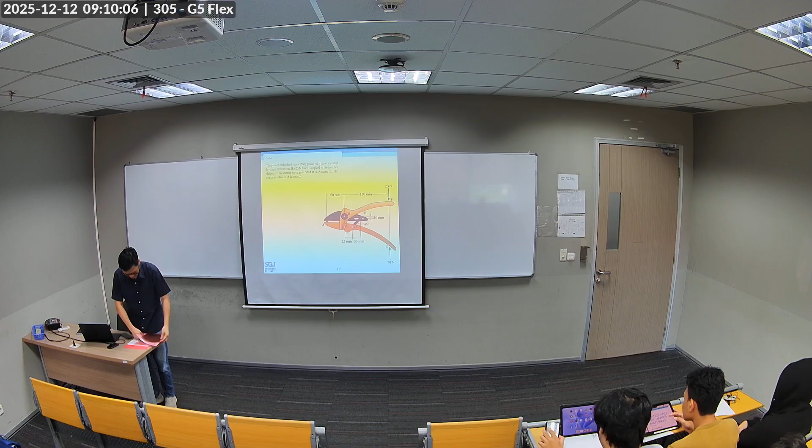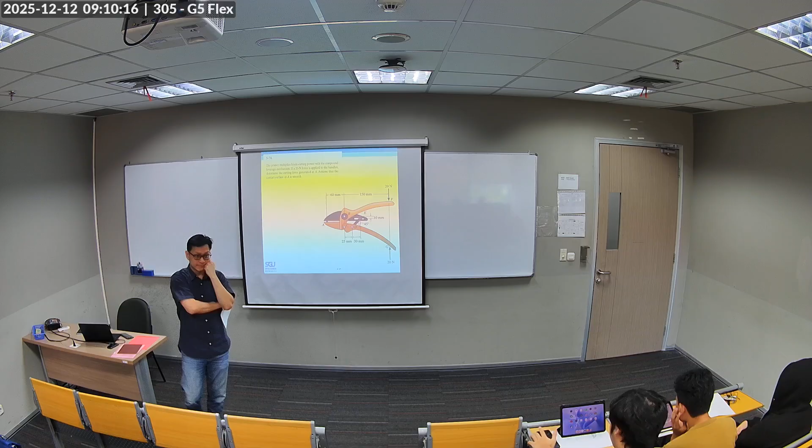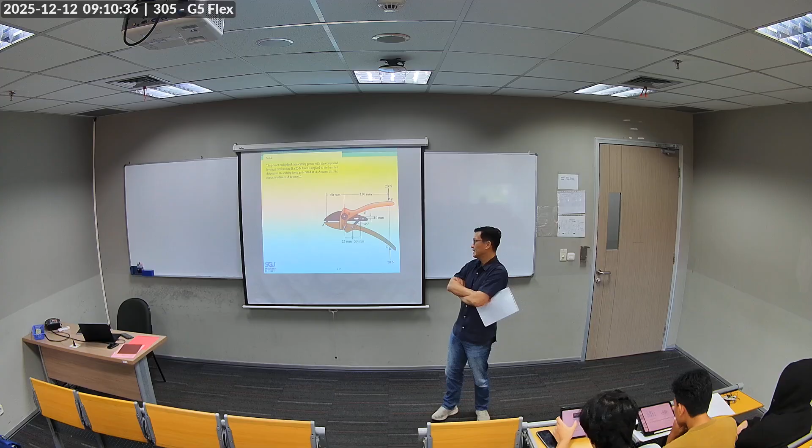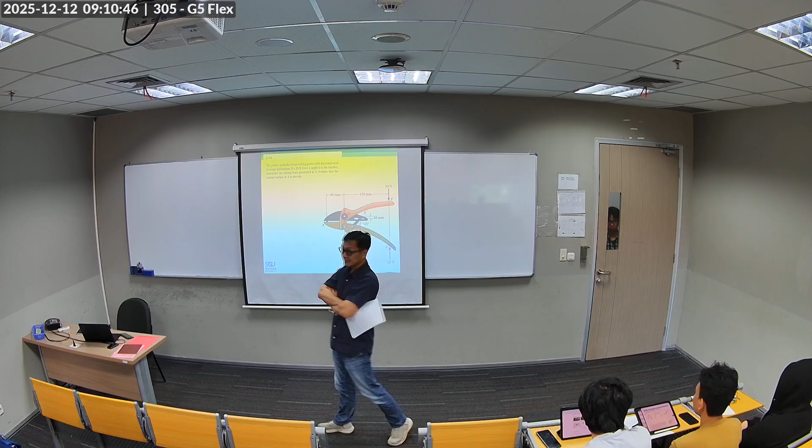Okay, so we need to do a few exercises today on frames and machines. I think we did a little bit last time. Let's do more problems because the final exam will basically be frames and machines. Okay? So these kind of problems. So the final exam will be 2 problems and I think both of them will be like this. Both problems. I don't know, maybe I'll do one truss like what you just did. You want to do trusses? I don't mind. 2 problems on this, 1 problem on truss. How about that? 3 problems? You got 2 hours. How long do we have? 2 hours. That's a long 2 hours. What are the options?

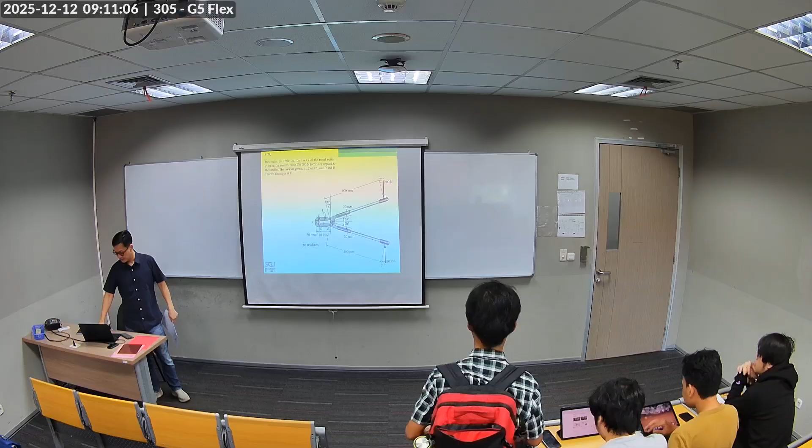120 minutes. Option A, 2 problems on these types, frames and machines, right? Or 2 problems on this plus 1 problem on trusses, what you just got back. I mean, if you do 3 problems, then this might actually help you, I think, if you feel more confident. Who is more confident with trusses? Nobody? Okay. Because that might actually help by distributing the points to 3 problems. I guess. Okay. All right. Let's do a couple of exercises on these. Did we do this one? I think we did. No. Okay. All right. Let's do it then.

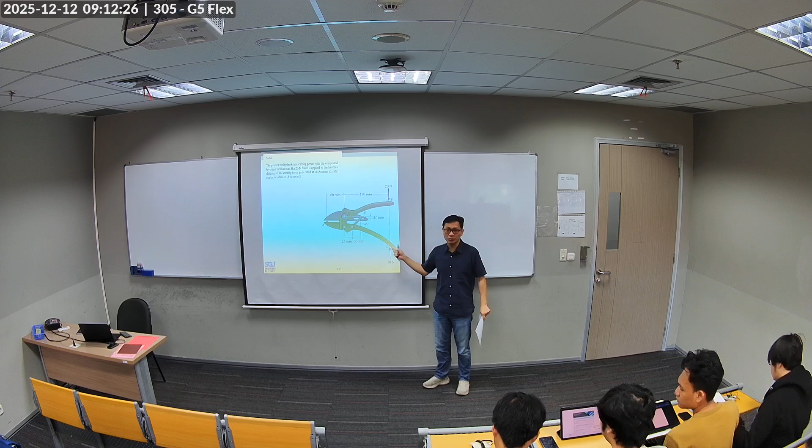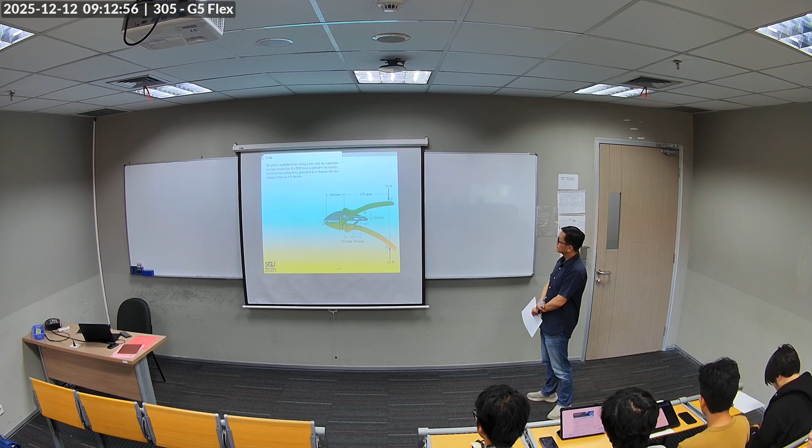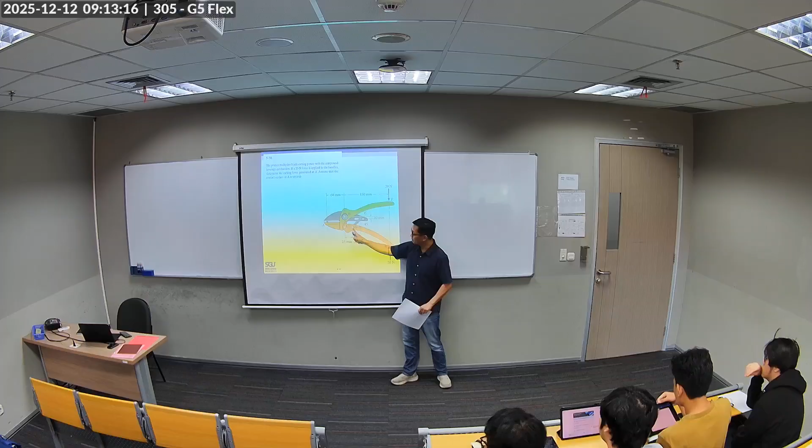By now, I expect more initiative from you guys. So tell me how to proceed. Okay, so the pruner multiplies the force from the forces here to this one. I think we did something similar, like 2 weeks ago, right? Open your notes. What problem was it? It's also a plier, right? It's a plier mechanism like this, but it's a bit different. So basically, given these forces, what's the cutting force there? Okay? So, what do you want to do? This is one body here. This is one body. This is one body. You got the link at C, linking this handle with this handle. And you got the pin at B, linking this handle with this link. And then you got the gray opposite side, the other side of the cutter.

So what will be the first step? Draw this. Free body diagrams. On which one do you want to do it? Remember, this is my ultimate outcome. Between F and B. So ABF, you want to do ABF? Yeah. Okay. So that's ABF. Let's draw all of this, just for the sake of exercise. Here, you come up and put the forces there.

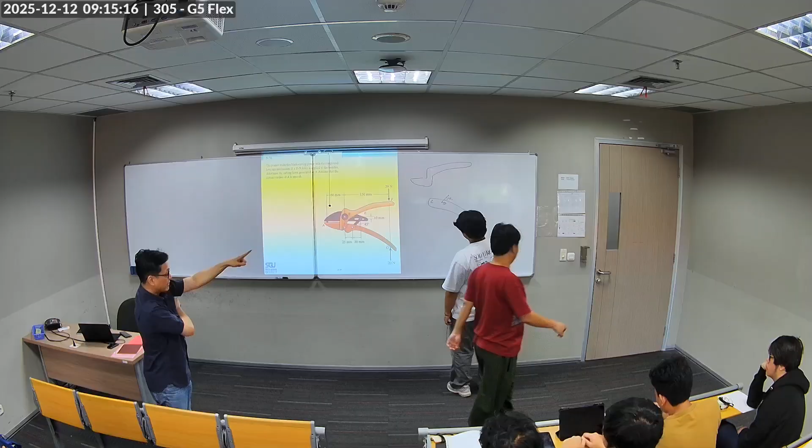Now, what is special about link DE? It's a two-force member. So what's the consequence on the free body diagram? Put the point D there. So because of that fact, what's the consequence on point D? You see what he's drawn? Only one unknown, just a single force in that direction. So you know the direction. Don't draw Bx, By. In contrast, what about C? The unknowns will be 2, Cx and Cy, because you're not linking to a two-force member. Here, the link DE is a two-force member. So if I draw link DE, what is the free body diagram like on link DE?

Okay, notice at D. Why do you draw it in this direction? Because it's opposite like that. But what about this? Its relation to this. Before you draw that, I mean, a two-force member can be tension or compression, right? Why do you not draw it like this? And this. That is also valid, right? He's assuming tension, but there is another reason, a more important reason why.

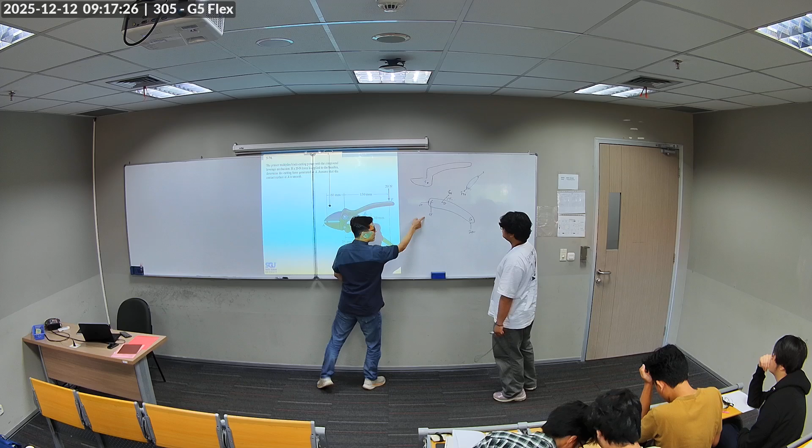Look at that. Look at this arrow. So, yes, equal and opposite. So if you draw FD like this, then here it has to be equal and opposite. Go ahead, redraw what you've drawn. Yes. Okay, is that clear? Okay. What about the link at C? Now, there is also then the point C here, right? This is point C, on this handle. So, if he draws CX and CY like this, then over there, it has to be the opposite direction.

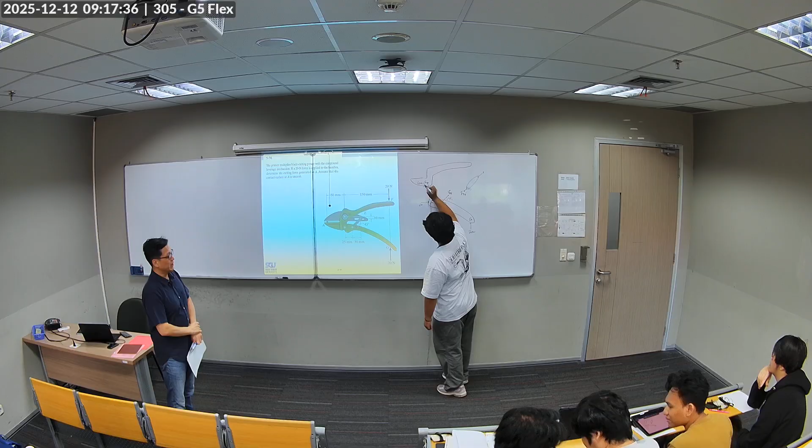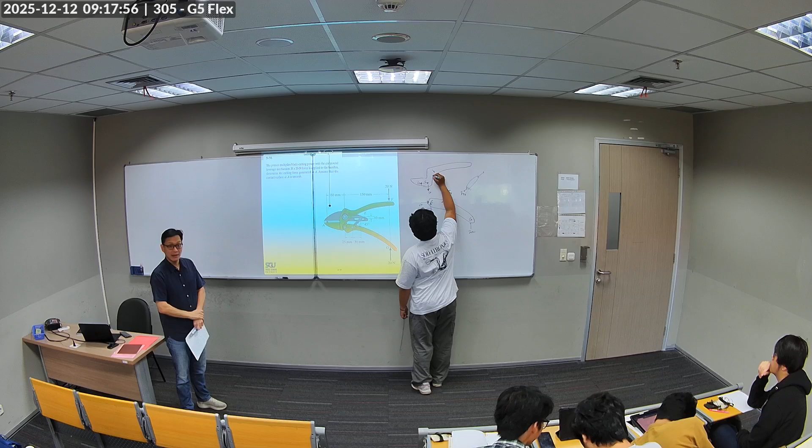Okay, make your arrow a bit bigger. Like, yeah. Okay, finish the free body diagram on the upper handle. You got the point B. Now, because we don't have point B yet anywhere along the other bodies, it's really up to you how to define it. Okay? Okay, so he defined Bx and By like that. Now, draw the free body diagram of the gray cutter. Yeah, on the right hand side.

Okay, you can have a seat. Let me have somebody else. Okay, Stephen, you want to give it a shot?

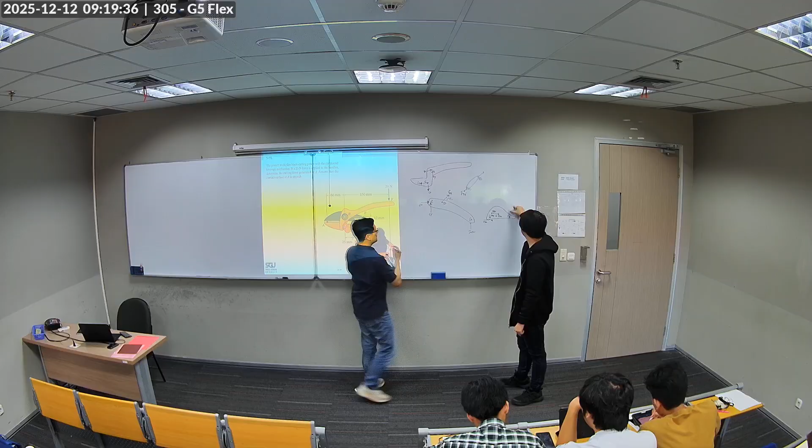So on the cutter, we have A, B, E, right? Okay. At point B, you have to refer to the other body, right? It has to be equal and opposite, because that's the linking between that handle and this. Label your forces. X and Y. Okay, what about E? Which direction should it be? This way. Okay, what is the next body after this? That link, right? And so, this is point E. Yes. Okay, does everyone see that?

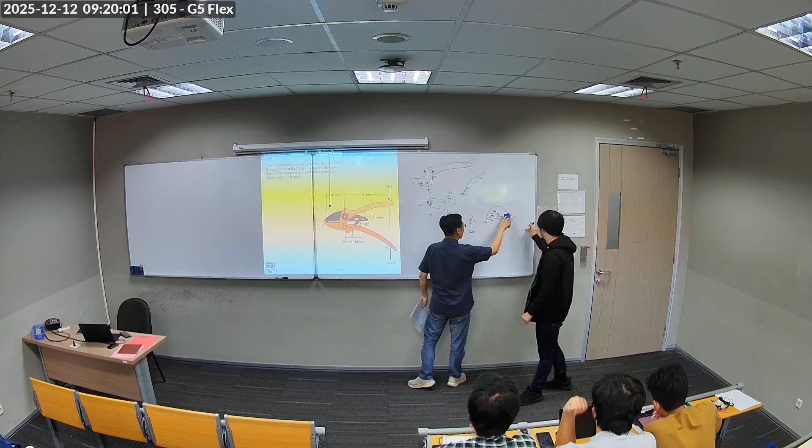Oh, you want to split that? Okay. Well, usually I don't split it until you get to the equation, so it's not confusing. Okay, thank you. So, everybody understand how the connection points have to be opposite? Okay, if you draw this wrong, then everything else will be wrong. Okay, does anyone have any feedback about the point A? Any comment on what he did? What kind of contact is that? Roller. It's not a pin.

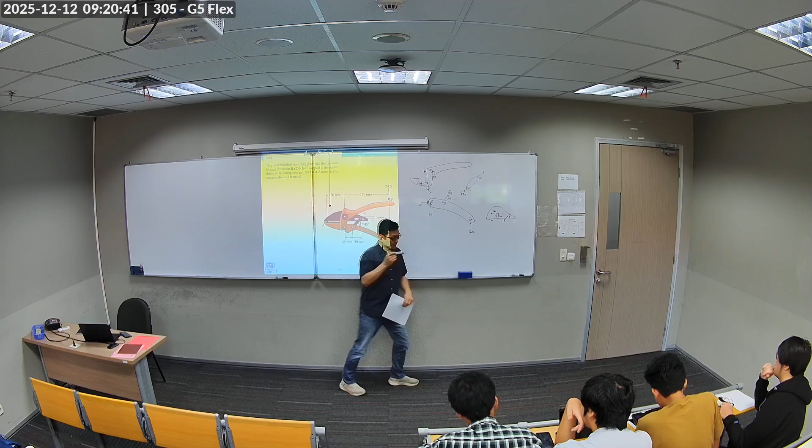Okay, so a roller will have one force, which is normal to the contact point, right? So it's like this. A point contact, it slides on this board, right? It only resists in one direction. And I would also draw it upward like this because it's cutting this wire. It's a wire, by the way. You're just looking at it through the board. It cuts the wire, so the wire actually resists the cutting. So on this upper cutter, the wire actually puts a force upward, right? The gray piece cuts downward, but the wire actually resists upward.

So if you are the cutter, you would experience a force downward or upward? Upward, right? So I'm stepping on the floor. The floor is pushed down by my foot, but my foot experiences a force up from the ground. Get it? Okay? So it's cutting the wire downward, but the wire resists upward. So you can imagine that. So the force is like this. And it's only one because it's a point contact.

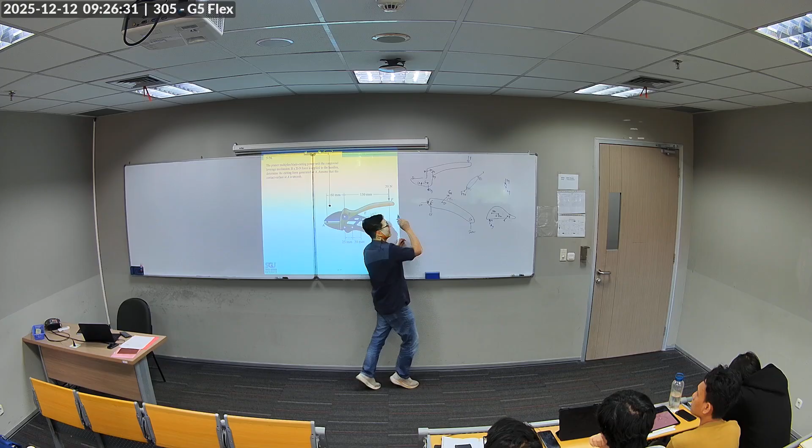I guess you can. So you're drawing two bodies in one free body diagram, you can. But generally not a good idea. If you do this, let me draw it bigger. There is a force actually from this guy, right? Because it's here. So you are eliminating that force. The one in red is there, but it's internal. Because you draw your boundary including the wire, this red force does not exist because it's internal to it. Does that make sense?

So yes, you can do this. But for the sake of learning, I want to make it simpler and just separate the wire, because mechanically it's also two separate bodies. If you take mechanical engineering as your major and more advanced courses, you can actually do a method of sections here. So if you do that, there is an internal force like that. But this force is internal, so if I draw the entire body, you see I have this force and this force and this force.

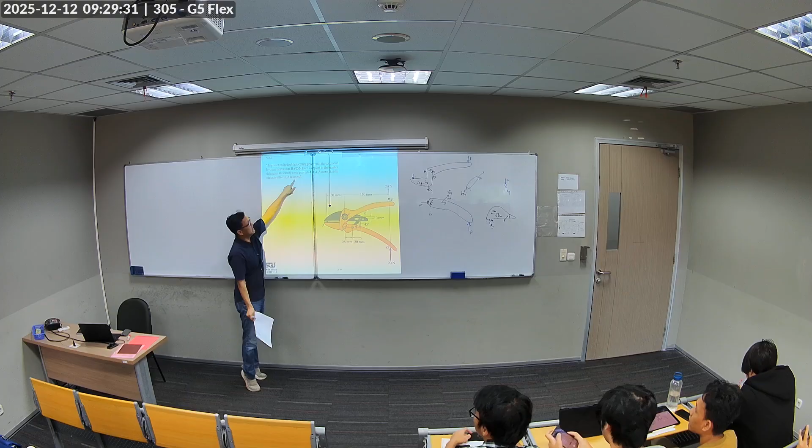Okay, time to do the equations. Assume the contact surface at A is smooth, meaning it's a point contact, it can slide, meaning there is no AX. That's what it means. Okay, let's do the equilibrium. What's the strategy? I want to know AY. I know F. How do I find AY?

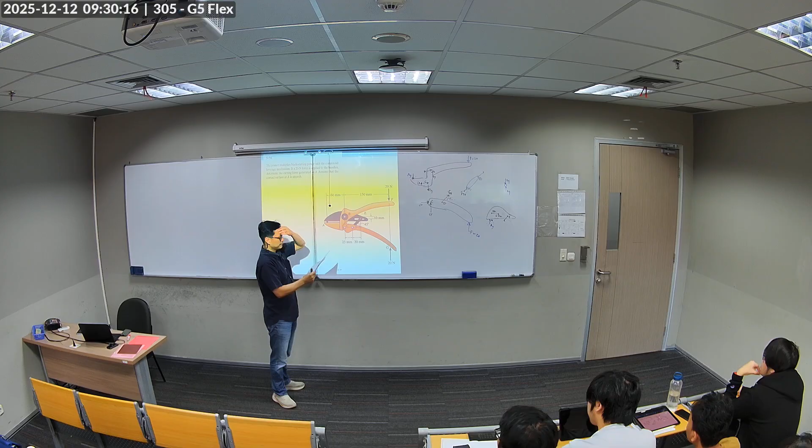AY exists here and here, so you need to trace your way from the known to the unknown. Do you want to start here or here? This is your known. If I start here, my link is FDE. If I solve FDE, it connects me here and here. So let me do that and we'll review. I start from the known, so my target is to solve this guy. I'm not interested in solving Cx and Cy because they're not relevant. So how do I solve FDE?

CD, G. This is point G. So I want to solve for FDE. I know this is 20. What do I do? Sum of moments at C, because you'll get rid of CX and CY. This is my pivot point. Counterclockwise, 20 times 150. This is the distance to point C, 150. This is FDE.

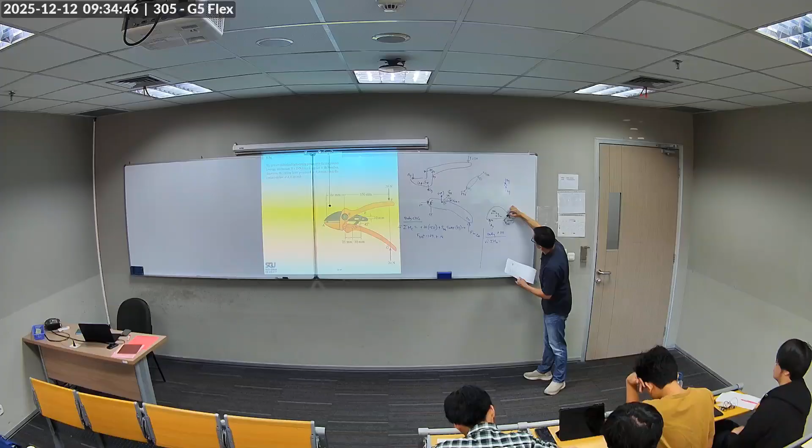Now this is a bit tricky because you have FDEY here and FDEX, both of which create a moment about B. Okay, so this is going to be a bit long.

So sum of moment about B. First of all, we have AY, so that's clockwise. So AY times 60. The distance is 60. Now I have FDEX. So I have this one creating clockwise moment. FDEX times, what's the distance? 10. Okay? Does everyone see that? This distance is 10 on this gray piece.

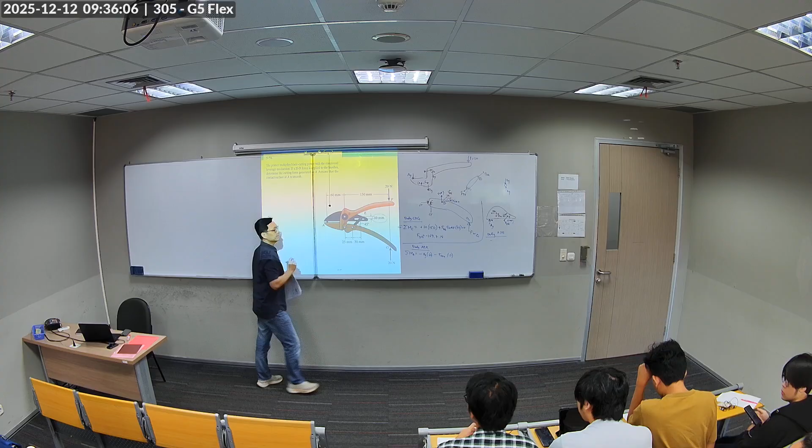And then I have FDEY. That will be another clockwise. This guy. Okay. What's the moment arm of FDEY? ...get that from? C and B are in the same spot, and the distance between C and D is 15.5. So this is FDEY. Okay, this is my pivot point. This is my distance. Okay?

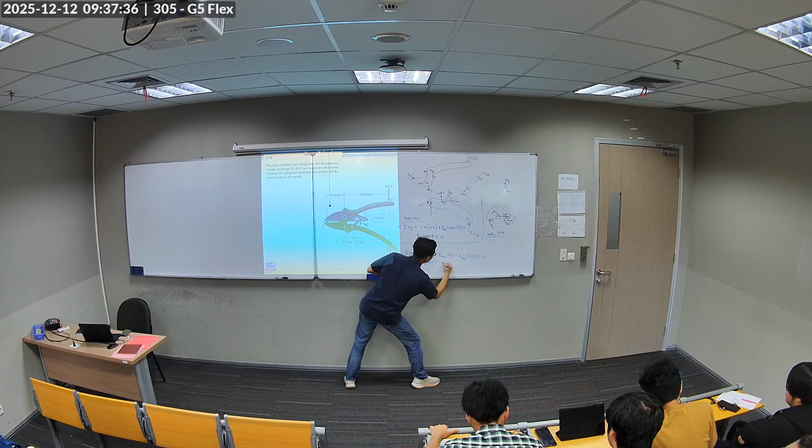Are you still with me? Yeah? Okay. Now FDEX is FDE times sine or cosine, doesn't matter. And I'm going to substitute the numbers directly, okay? So it'll be minus 169.7 cosine 45 times 10 minus, I know it's kind of annoying with this minus, but I think it's still the best way, because then you just do it with no thinking. Just carry all the signs, and you'll solve AY.

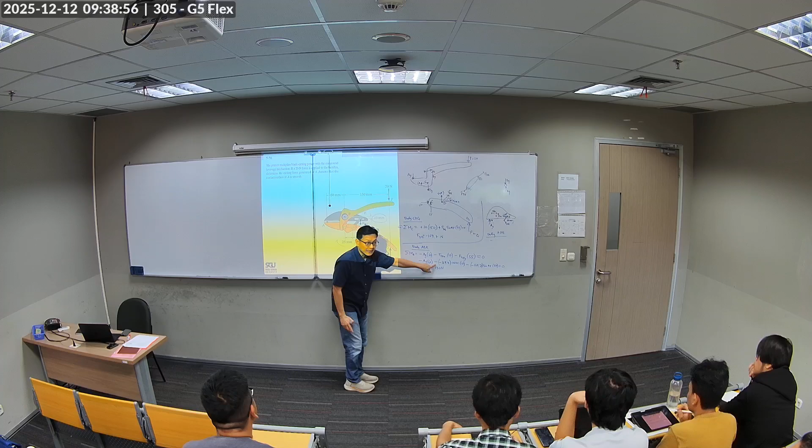Okay? What I want to highlight is we solve for negative here. Don't change the arrows. It's already negative here. The drawing should be consistent, right? It's this way here, this way, that way, and this way, right? Always equal and opposite. And then when you do the equation, you have to put in and carry the sign. You gotta carry the sign, because our assumption was already like that. Okay? The first negative is due to what? It's going the direction, right? It's clockwise. But the second negative is because we solved it to be negative with all these assumptions.

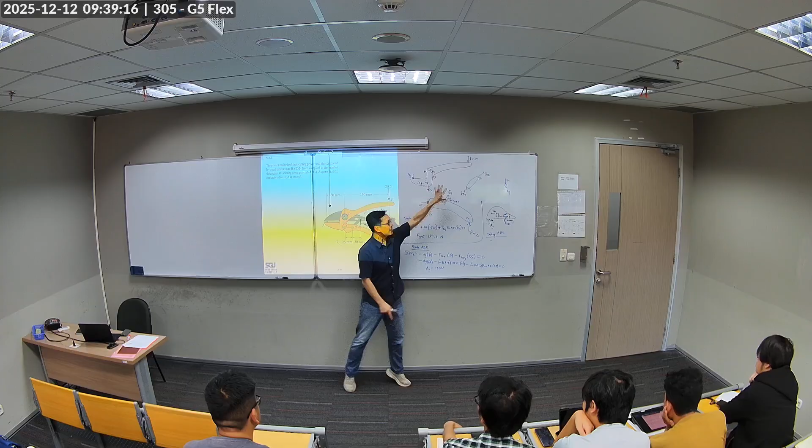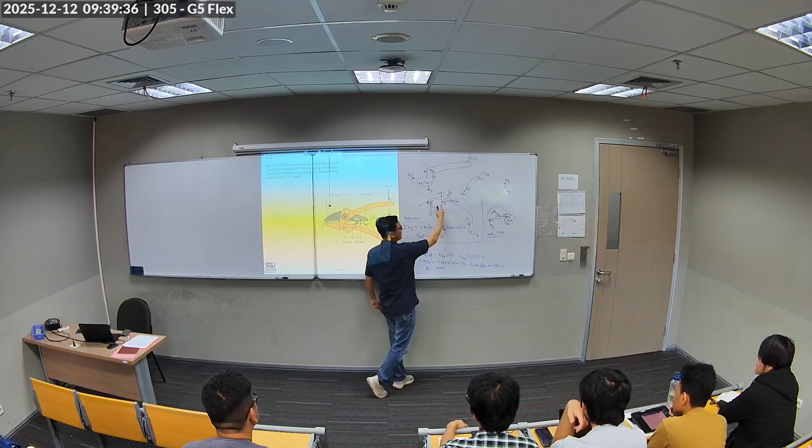See, the problem is you cannot know what it will be like unless you are a mechanically genius person that knows it's kind of pushing this way, right? I mean, sure. But most of us can't. I'm too lazy to do that. So I'm just going to draw the arrow this way, and then this way, this way, this way. Okay? Whatever it will be, whether positive meaning I made the right assumption, or negative meaning I made the wrong assumption, I don't have to correct my assumption. Just carry the sign through and you'll be consistent.

That's my method. Okay? If you want to flip the arrow, let's say you find this to be negative, and then you erase this, and you flip it, then you have to flip it here, flip it there, and flip it here. You can do that. If you really know what you're doing, I'm fine with that. But I don't suggest that. Okay? It's very hard. So we solved the problem. Two equations. Without solving Cx, Cy, Dx, and Dy. The free body diagram looks complicated, but if you are strategic, then you don't have to solve these elements.

Okay? This one is similar, so I'm not going to do it. Let me do this one. Any other questions on the previous one? On this? Okay, let's just keep exercising.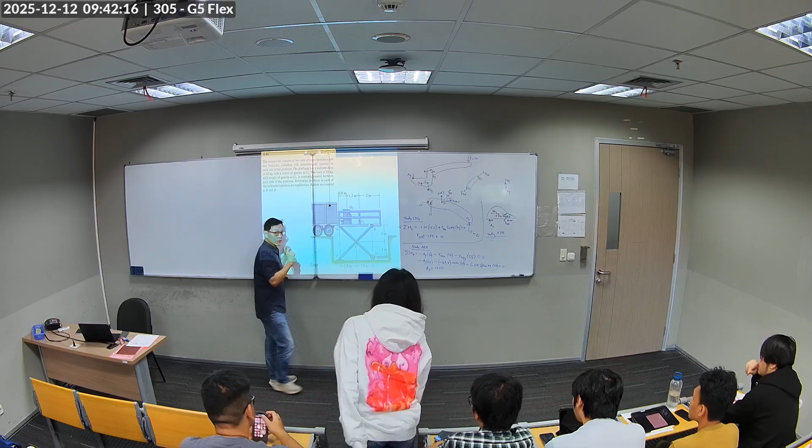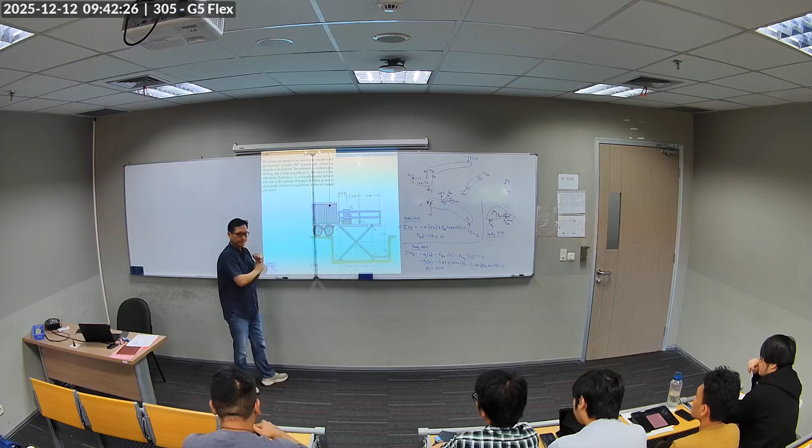Disassemble this in your head. You got the platform, you got this piece, you got that member, and you got the hydraulics actually pushing or retracting. These are wheels, these are rollers. So you have a point contact here, point contact there, a pin, and a pin. Okay? Now, take a piece of paper and actually draw these free body diagrams. Exercise it. I'll give you 10 minutes to do it.

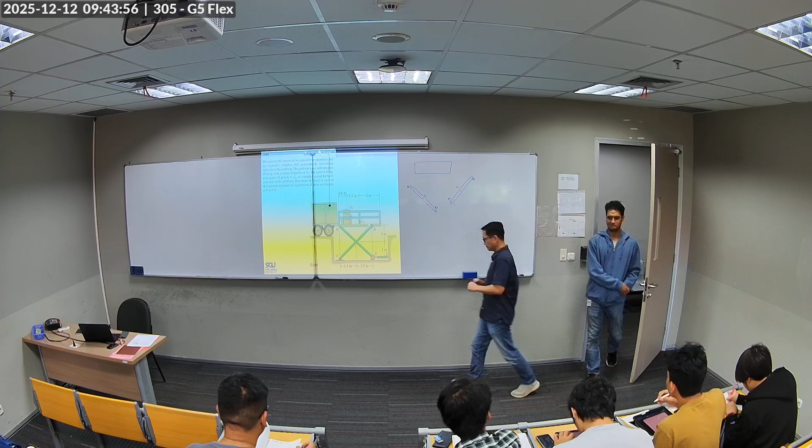Get the platform. Go ahead. Draw everybody. Put the arrows down.

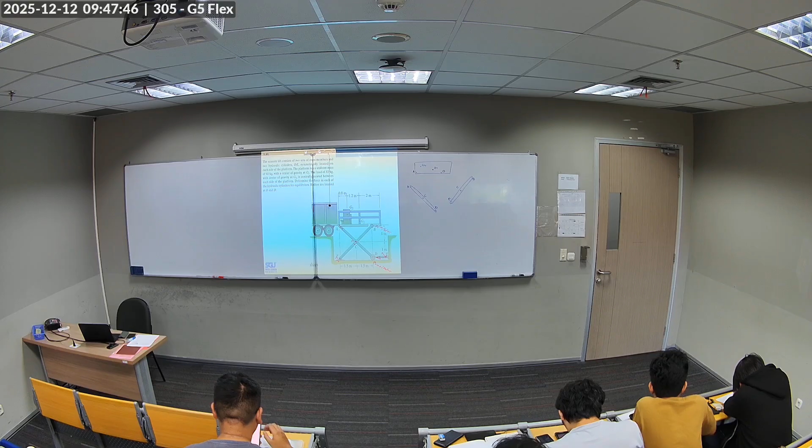Okay, are you done? No? Okay, keep working on it.

Still trying to figure out where I originally... hydraulic members are only D and B, right? By the way, it also says each side. So this is actually a two-dimensional representation. Repeat, sorry?

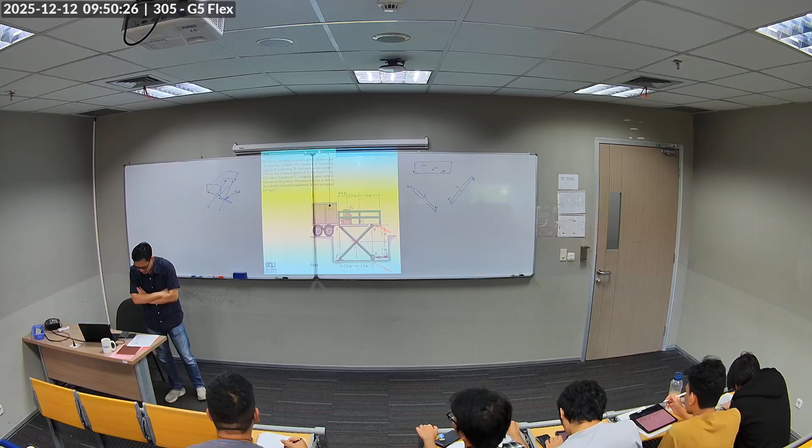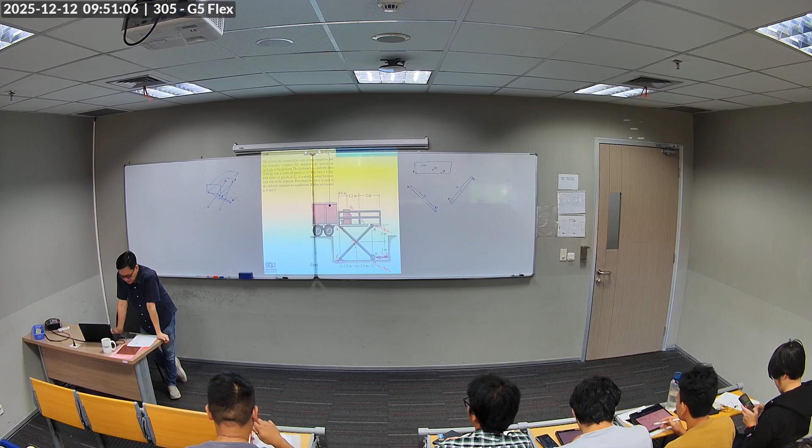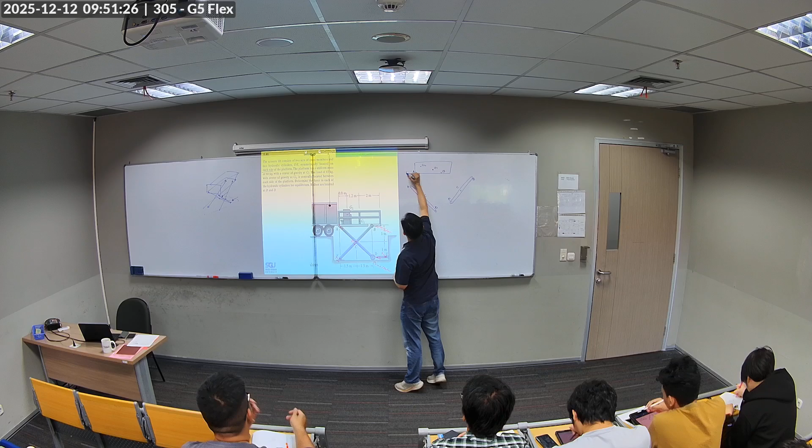Point A is a pin, so you guessed it, it'll have two: AX and AY. Okay? Goes up there. You want to continue? I think it's go down because of the weight difference. Continue on the platform. Reset it, and then just make the other one equal and opposite. Label it in the middle. Yeah, we have to find that out. Yep, there is gravity.

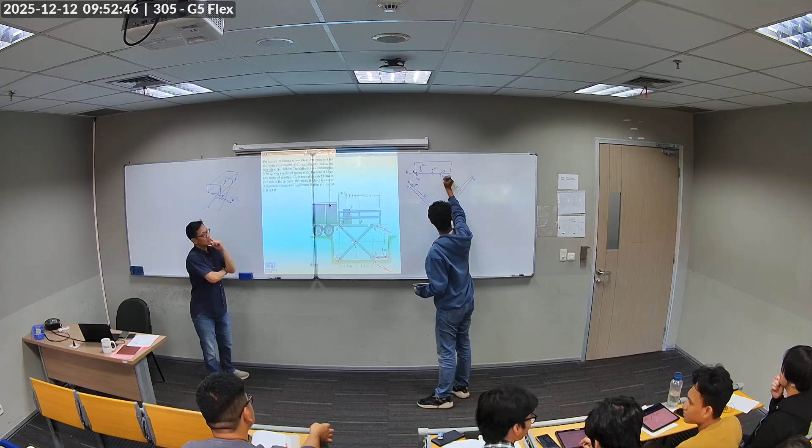Wait. What about point B? It's a roller, so there's, well, think about it. This is the platform. The roller is pushing up, right? The roller is supporting the platform. So if you are the roller, are you being pulled down or are you being pushed up? You're being pushed down, right? Yeah. Negative. Okay.

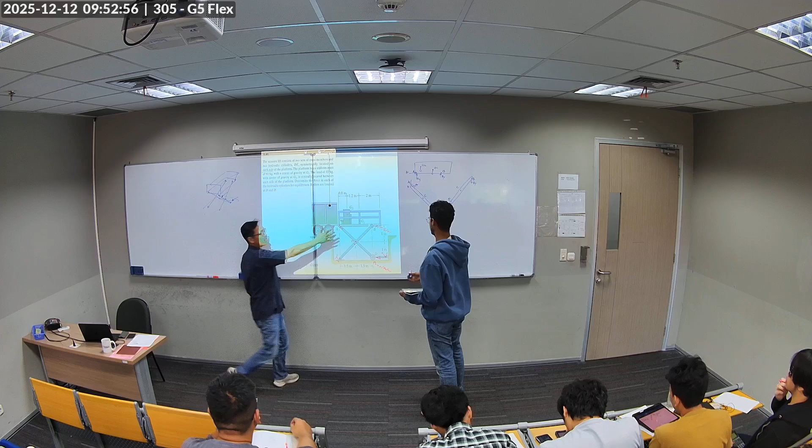Okay, let's continue on this member, ACD. B is also supported from the ground. C is a pin. So that means G2 is load of 85 kilograms. X and Y.

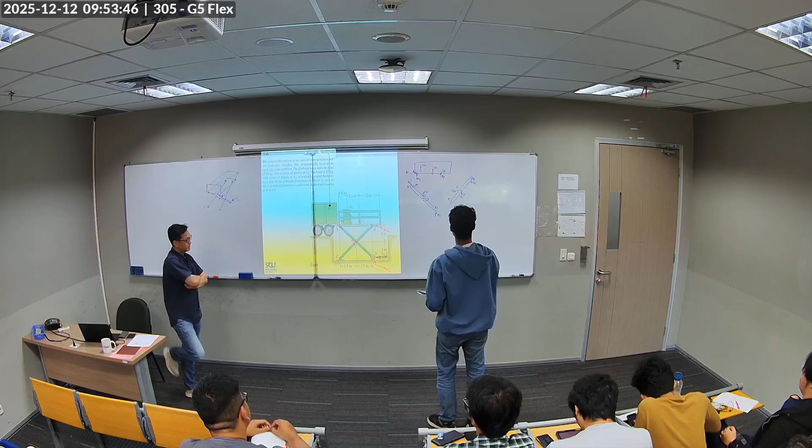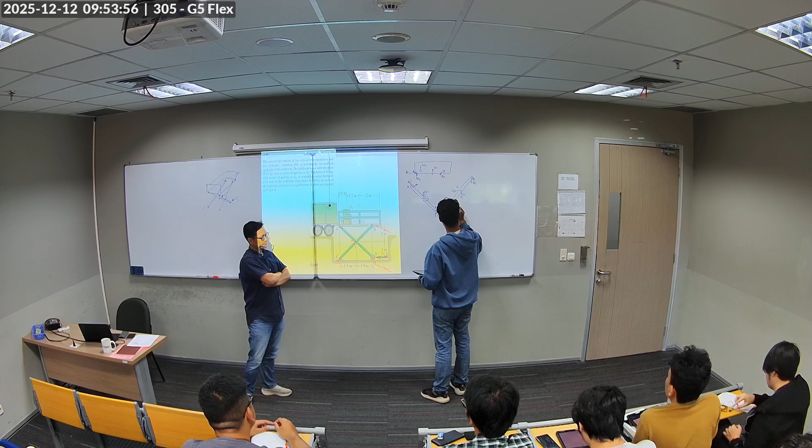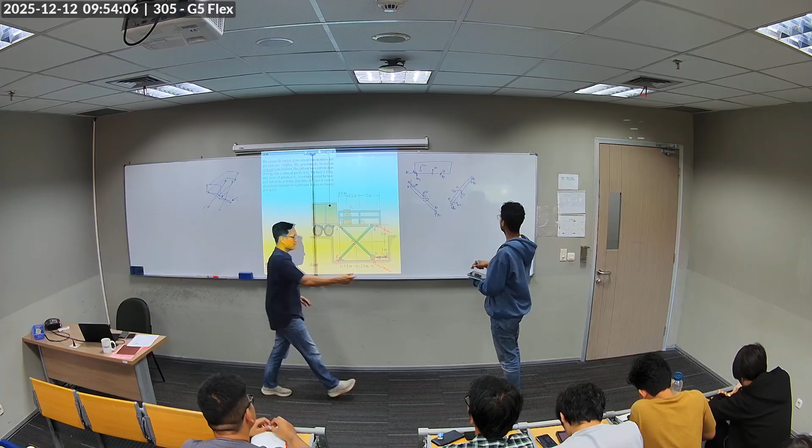So the other C will be equal and opposite. F, it's a pin. Alright. Good job. So, we're just missing one, which is the hydraulic. This is the external force. I'm going to call it FDE, or the hydraulic. It's not from the pin. B is a roller, but there is a hydraulic force. So this is not BX, okay? This is the hydraulic force.

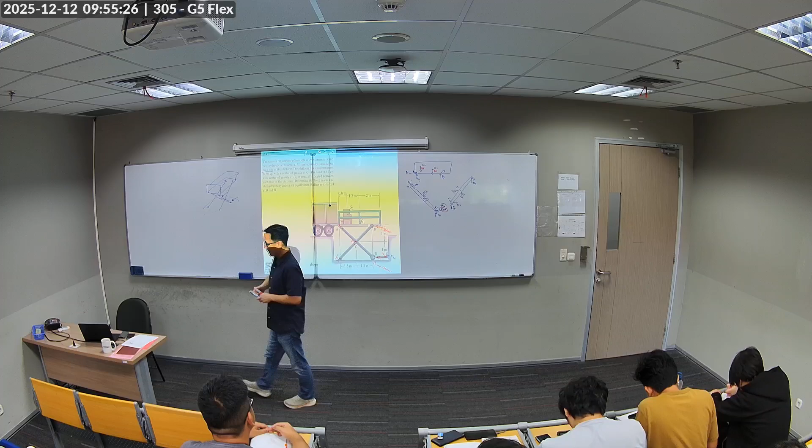Okay, so now I want you to do the equation. Let me give you some hints. What's our unknown? Determine the force in each of the hydraulic cylinders for equilibrium. So FDE is my unknown. What do we know? We know the load. This one is 60, 85. So now we want to find FDE.

Where do we start? That's what we're trying to find out, FDE. Moment at A. Moment at A, we'll find BY. Okay, that's the first step. Next, sum of forces on the Y to find AY. I don't know whether we'll need it. Let's explore our thoughts before we actually do it to save time.

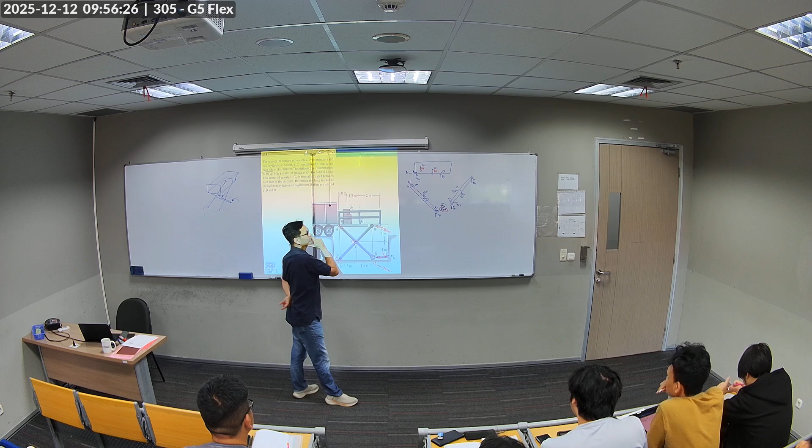So we know BY here. Four unknowns, so I cannot solve that directly. But if I do a sum of moment on F, I can have a relationship between Cx and Cy. I can also do a moment about this, and if I know Ay and Ax, then I also have another relationship on Cx and Cy: two equations, two unknowns. We can solve Cx and Cy. Once we know Cx and Cy, can we solve FDE?

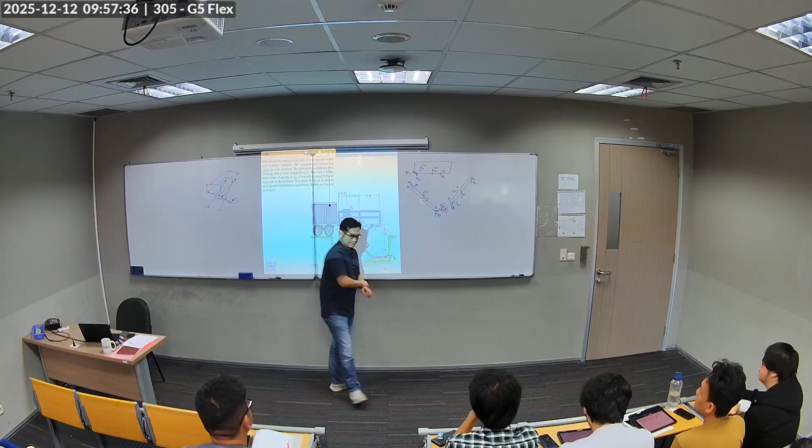Yeah, I think we could just do sum of forces. Okay. Sounds like a plan. Why don't you solve this one first? Do it as an exercise. Take 5 minutes. Instead of 9.8 for gravitation, I don't want to use 9.8. I just want to use 10.

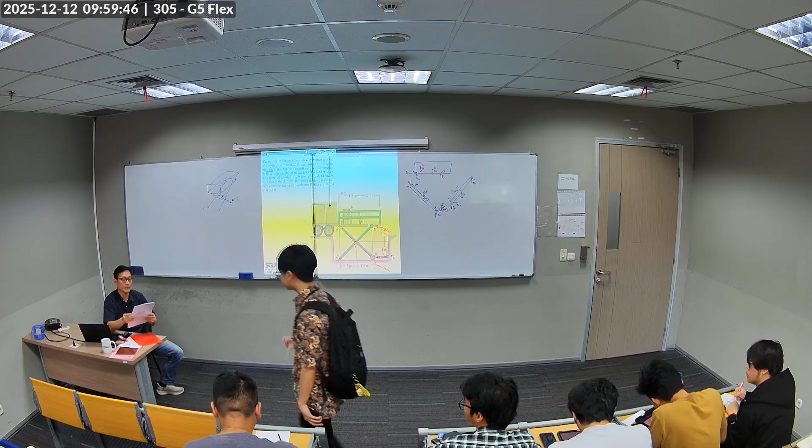What's your name? For BY: for G2, the load of 85 times the distance, 0.8, times gravity. I got 66.4. Okay, you got your AX, AY. So on the platform, what do you guys do? Ignore CY. Sum of moment about A. We have to use BY. Distance is 3.

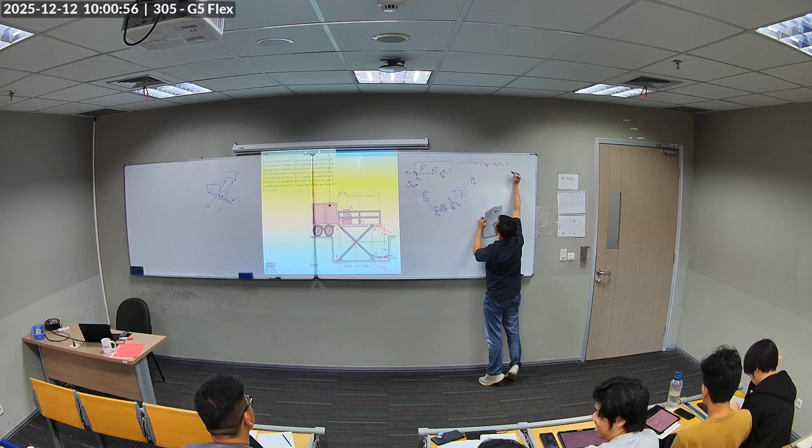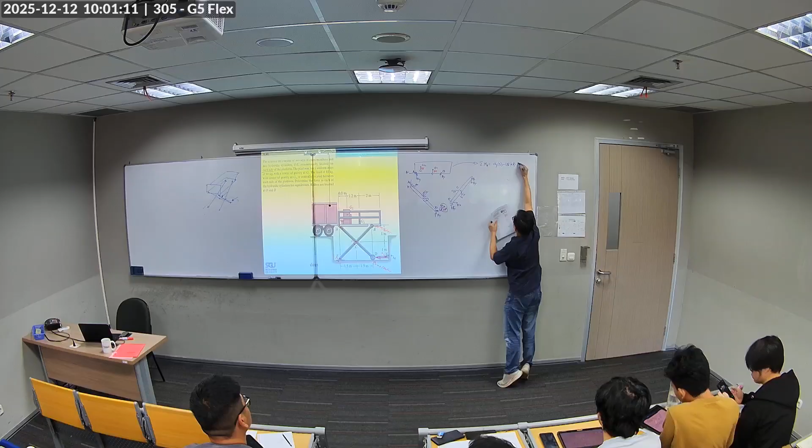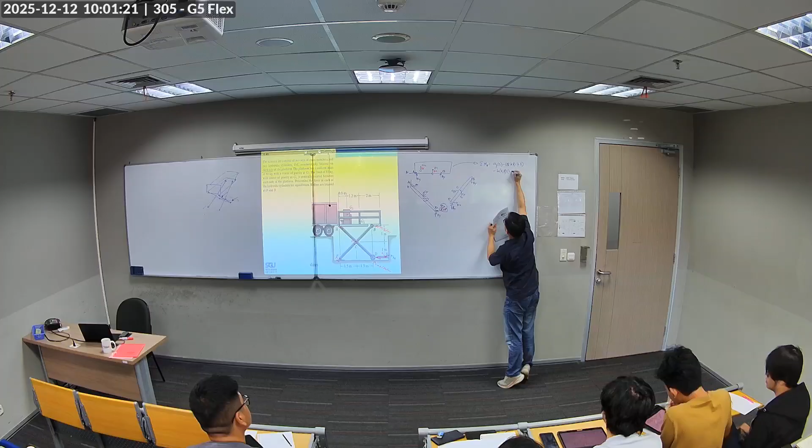And then minus 85 times 0.8. 85 is actually kilograms, so you gotta times it by gravity, times 0.8, and then also minus 60 times 2 times 9.8. Okay. Alright. I like how you are actively contributing.